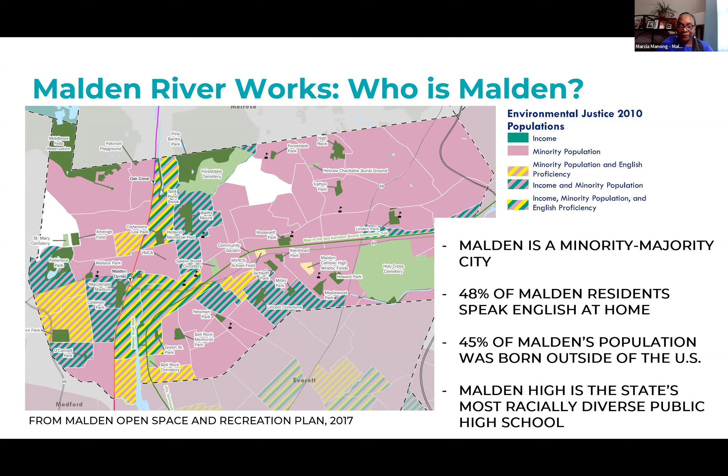So just a bit about who is in Malden. We are a minority-majority city with environmental justice populations dispersed in several communities throughout the city, including in close proximity to the project site. 45% of Malden's population was born outside of the US, and Malden High School is the state's most diverse public high school. We take pride in who we are and how our diverse cultures complement one another. Next slide, please, thank you.

How we began. The Norman B. Leventhal Center for Advanced Urbanism solicited international project proposals focused on equitable resilience. We formed a prize team along with Malden's Mayor, Gary Christenson, who was an ex officio member. We presented to the jury of international panelists at MIT. And in 2019, Malden River Works was awarded the first ever Leventhal Prize from MIT's Leventhal Center, inclusive of $100,000 to kickstart our project. And I can't tell you how invaluable that startup money was. Next.

The Leventhal Prize sought proposals that made equity a central goal for resilience efforts, to develop physical design solutions that do not reinforce existing inequities and wouldn't create new ones. What we needed to do next was create the governance structure, determine exactly what it was going to be, and assemble the steering committee that was representative of Malden's diverse communities. Next.

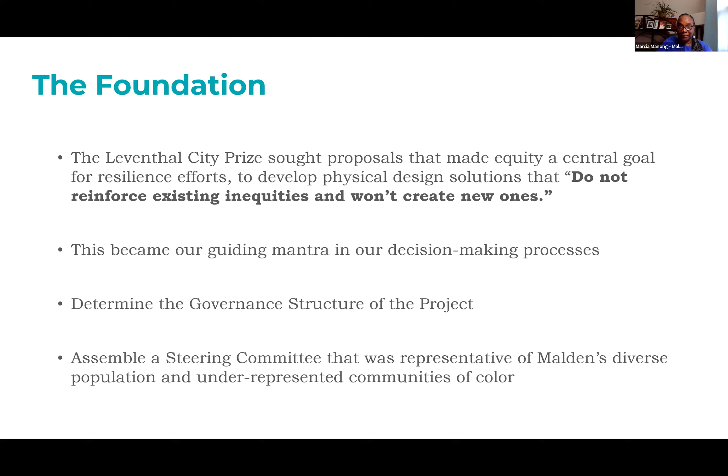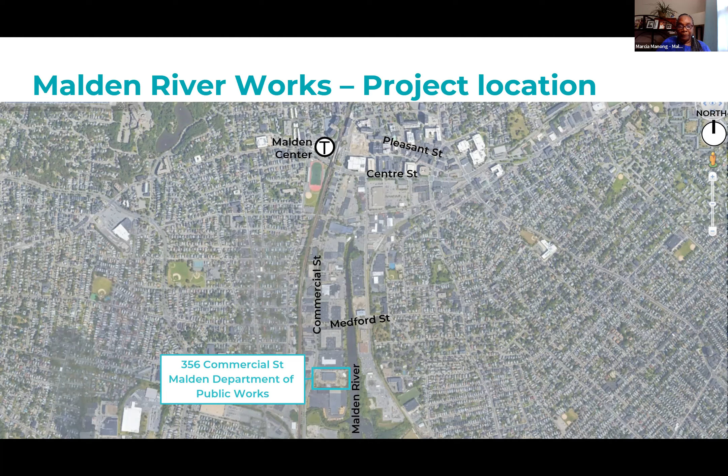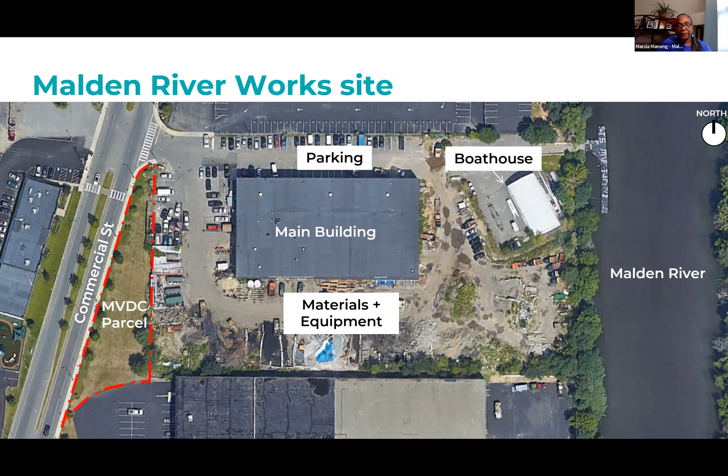Again, this is another shot of our existing boathouse, which is, of course, going to change in the new design. The second part of the project is transforming a portion of the DPW parcel along the river into a climate resilient greenway park that will allow public access to the Malden River for residents, many of whom have lived in Malden their entire lives, yet never had access to the river. And as you know, public spaces are becoming increasingly important areas of recreation, as the typical indoor recreational spaces are closed or limited because of COVID. And this becomes even more important during the hot summer months, particularly for environmental justice communities who often lack economic stability and resources to help them mitigate the impacts of climate change. Next.

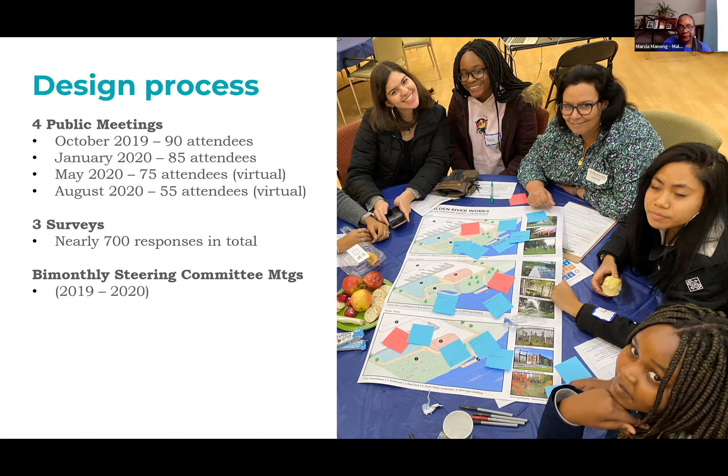Our design process was collaborative, inclusive, and sought to listen to as many voices as possible. Translation and interpretation were a necessary part of our outreach and public meeting process. And we held 4 public meetings, 3 surveys, and had bi-monthly steering committee meetings.

Next. To get to the design goals, it was an iterative process. And eventually we came up with these 6 design goals: flexibility, connectivity, river access, inclusivity, nature, and celebrating Malden, reflecting the community stories and culture of Malden in the design of the park and the DPW. Next.

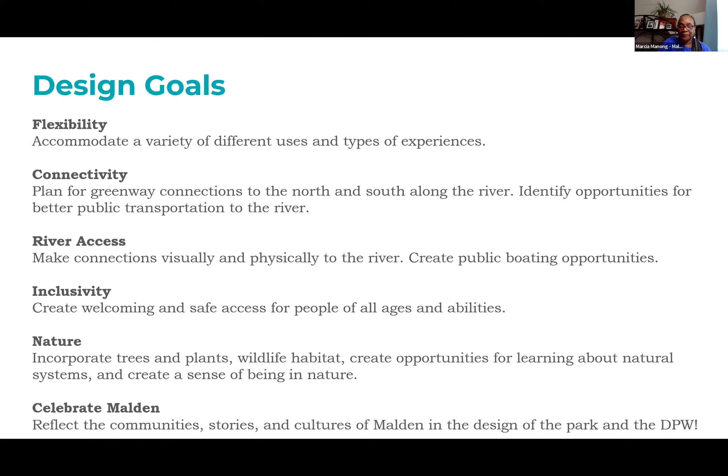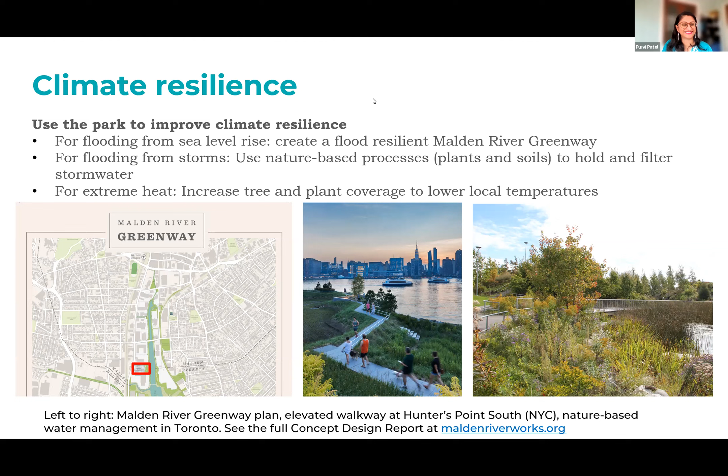So there are several environmental justice communities in Malden, Everett, and Medford located within 1 mile of the project location. Under the state's environmental justice criteria, the area includes minority populations, populations that experience English language isolation, and combinations of minority populations and lower than state median income, minority and English language isolation, and minority populations, English isolation, and lower than median income in combination.

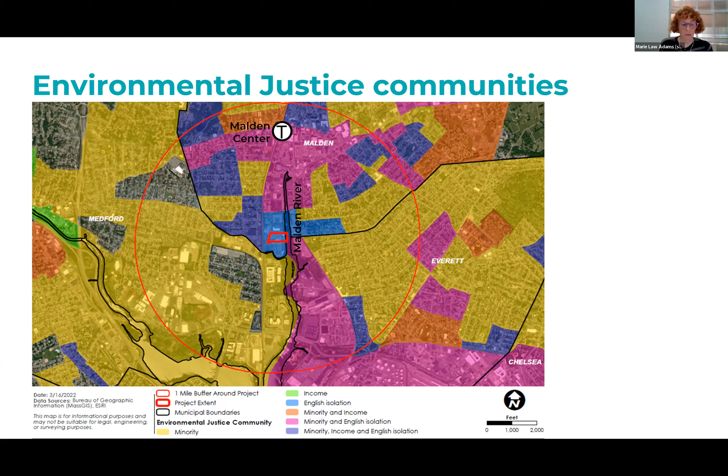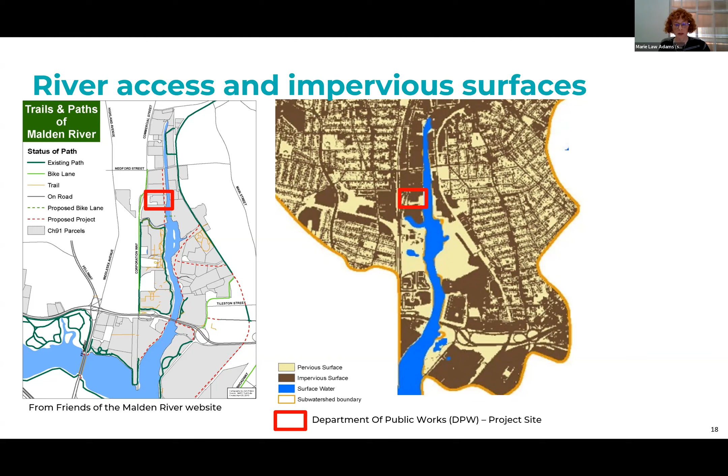The communities neighboring the Malden River Works site are burdened by environmental injustices that come from a history of industrial uses along the Malden River, which affect residents to this day. Some of these negative impacts include lack of public access, as described by Marcia, and an excess of impervious surfaces that contribute to higher temperatures and urban flooding, increasing the risk from climate change. Malden residents have identified access to the river as a high priority in other planning initiatives, such as the Malden River Greenway plan that was mentioned earlier. The project incorporates the community's priorities by building an important part of the Malden River Greenway on the only city-owned parcel on the riverfront in Malden.

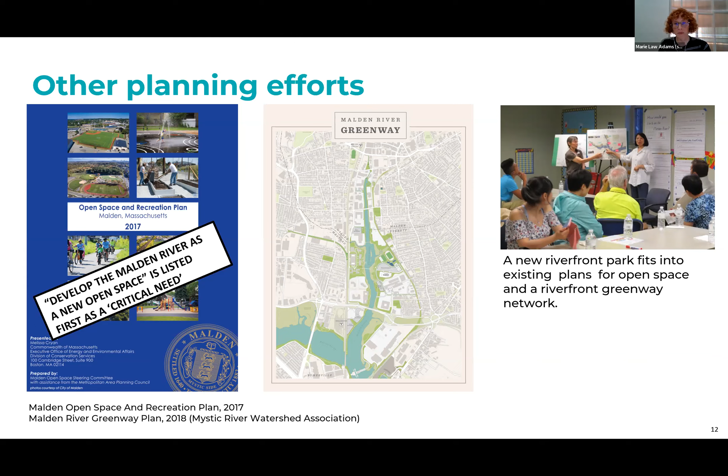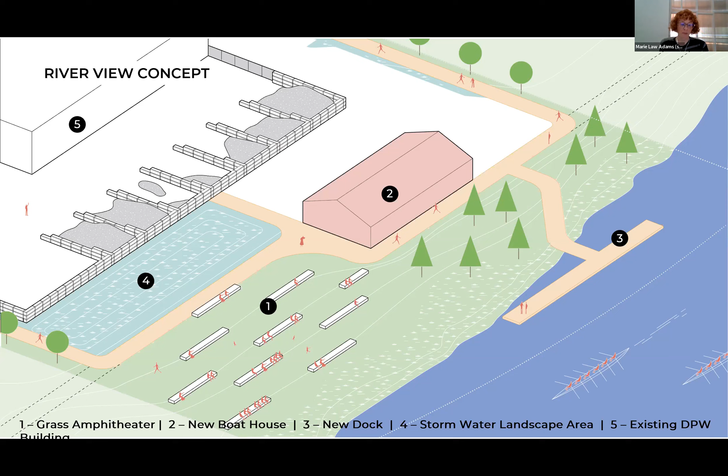So now I'm going to give an overview of our participatory design process, where we started with 3 alternative concepts for the new riverfront park space. Each of the design alternatives includes 4 main elements: a reorganized DPW yard to make space for the new park, incorporation of the Malden River Greenway path across the site, pathways to Commercial Street for safe access to the river, and a new boathouse and dock for Malden High School's crew teams, as well as community boating. The concept you see here is called River View because it focuses on creating a grassy stepped landscape-like amphitheater that would support views and enjoyment of the river.

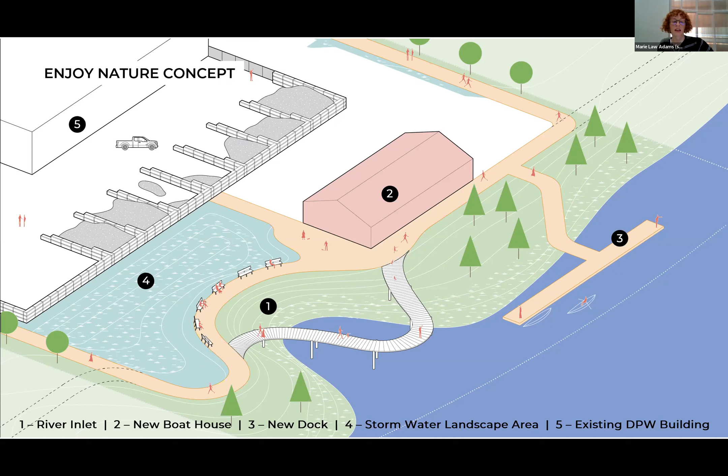The Enjoy Nature concept is focused on bringing people to the river and restoring the river ecosystem with a natural riverbank and boardwalk over the water. And then the third concept that we looked at was called Flexible and centered on the idea of a large, flat, open lawn that can be used for organized events as well as informal gatherings.

And so during the concept design process, we heard what were the likes, dislikes, and other comments on each of these concepts and found that Malden's communities tended to prefer the Enjoy Nature and Flexible concepts, and that the River View was too limiting in its use of the space.

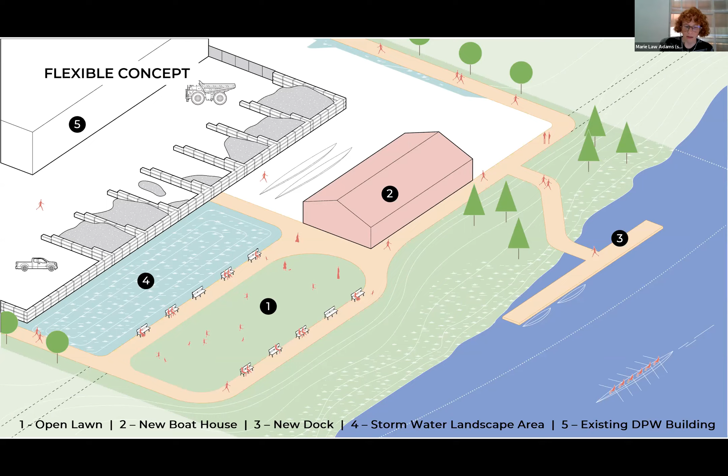This is the concept design that was created in response to this feedback, which combines major aspects from the Flexible scheme with the lawn that you see in the middle of the image and the Enjoy Nature scheme with the restored river's edge and fully accessible pathway to an extended public dock that provides access down to the river. It also keeps some of the sentiment of the River View concept by incorporating seating along the length of the accessible pathway to the river.

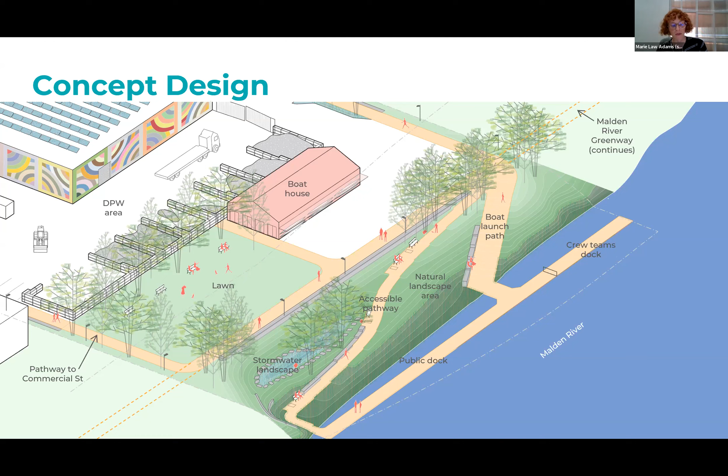The proposed location of the boathouse was also moved west at this time based on community feedback so that it would be farther away from the Malden River Greenway path to enhance a sense of openness and safety as people were using the path.

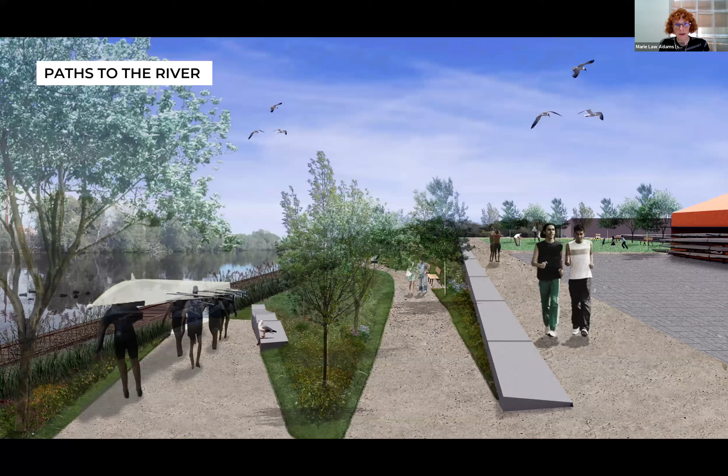These were some eye-level perspectives that were created at that time to create a sense of the look and feel of the park based on the design. So this is looking at the open lawn, the accessible pathway down to the river, and then some of the green stormwater infrastructure.

The project team created a concept design report at the conclusion of the first year of the participatory process to hold ourselves accountable to the priorities and vision established by Malden's communities. And then as the design has been advancing past the concept stage, the project website at maldenriverworks.com is regularly updated to keep folks informed of progress.

And so since major aspects of the physical design were established at the end of the concept design process, the Malden River Works team has shifted our outreach accordingly. We continue to hold community meetings to provide updates on the status of the design development and permitting process. We also continue to have bi-monthly steering committee meetings.

And then to increase the reach of the project, the steering committee piloted a decentralized meeting strategy last spring to bring the project to community meetings already happening in Malden, reaching over 340 people, many of whom were new to the project. We've also started to hold events on the river. You can see a picture from a couple of weekends ago on the right to build community there and envision how the river will become a civic space.

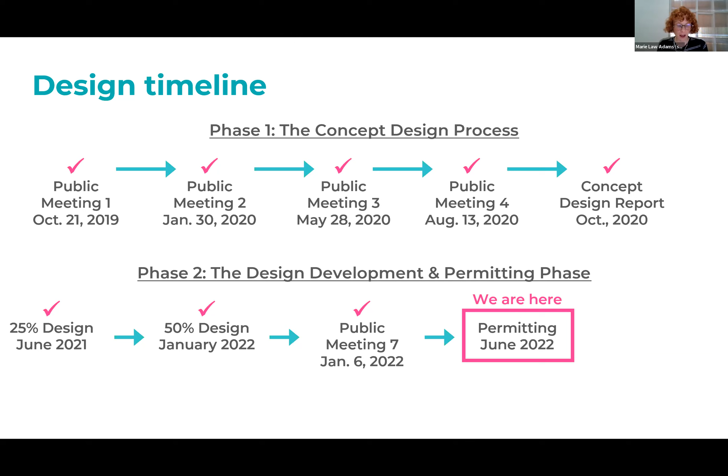And then this winter, we will hold arts, culture, and education workshops to figure out how the project will reflect Malden's communities in those ways. The bottom row on this timeline shows our progress through design and engineering after the first year of the concept process.

And then this is an updated view of the current design, which is really similar to the concept version, but with some small changes that have happened in the course of design development, such as the decision to reconfigure the accessible pathway to the river to avoid disturbing existing vegetation and shade trees that help reduce the heat island effect. And so that concludes the overview of the design process and current outreach. So I'm going to pause now and allow Purvi to take any questions.

Great. I don't have any questions. I did want to fully disclose that two years ago, I think it was 2021, I was one of the participants in the MVP review process that reviewed this project. So I have a lot of familiarity with it, and I see it as a really great blueprint for projects moving forward, and really just delighted to see that there's more access. I know that you're probably going to get into environmental impacts, so I wanted to wait to ask questions once that was the next step.

But thanks, Marie, for all of the information regarding how the public was consulted with the different concepts for selecting this amalgamation of designs that you now incorporate into the current design. So can you just tell me what the plan is regarding tree retention and tree planting?

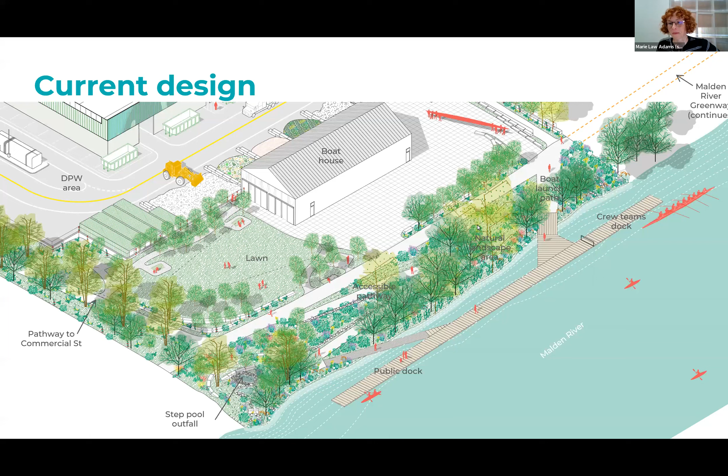Yeah, we're bringing, oh, Jen, would you like to answer? Okay. No, I was just about to say we're about to talk about it. So we can keep going, and I'm happy to keep going with that. Thank you. Okay, yeah, no worries.

So our current design, as the design process has done through the beginning of the process, really balances the activities of the DPW and their staff with the design of the public riverfront park and the desire of the community to make this public parcel and new open space welcoming and safe as a connection to the Malden River.

The design formalizes the DPW yard activities, creating storage areas for materials, as you see here, including a covered salt storage area and parking areas for equipment and staff. The design also allows for resident access to a yard waste recycling area that is now going to be outside of the main operations area. The DPW yard is separated from the publicly accessible spaces through fencing and gates that will provide safety for the public and security for DPW.

While the DPW's main entrance and exit on the northwest corner of the site will remain, an additional opening curb cut is proposed on the southwest corner of the site to allow for separate public access points to the parking areas proposed. This can also be used as a secondary egress point for the DPW staff and their equipment as necessary. Many of the features of the riverfront park that Marie mentioned that were developed through the concept design have stayed very similar. I'll just note a couple differences here.

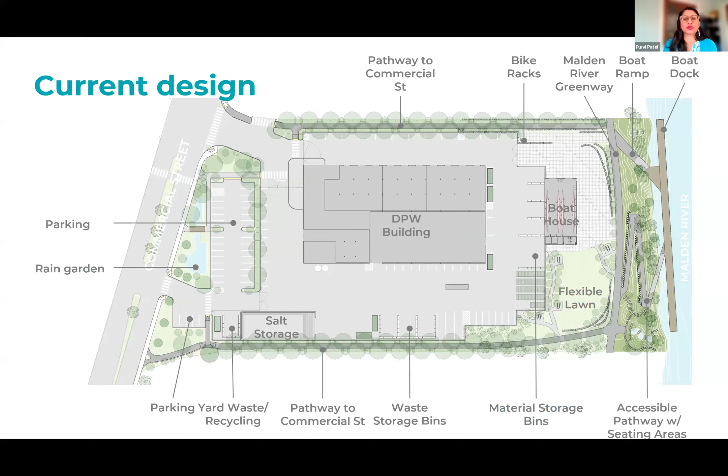Oh. Do you want to ask your question? Sorry. I didn't want to interrupt you, but I did want to ask a question while you're on that slide. Can you tell me what the site is to the north? And you can even bring it to the next slide, that's fine. My question relates to the discontinued area where there is a crosswalk along the northern stone dust pathway. Can you just remind me what is located to the north?

Yeah, so to the north, there's a property that's owned by Combined Properties. Actually all the adjacent properties, both to the north and to the south, are commercial properties with parking areas. That's the immediate point there. There is a sidewalk, at least on this side, that people can access all the way down Commercial Street. That, I believe, also has lighting and things of that nature for accessibility for people on foot or by bike.

So Jen, when people enter that northern access point, they can go straight to access the DPW building or the riverfront, or they can turn left into that northern site and cross the crosswalk? I'm trying to orient myself. Well, I'm just turning my head so I can. So if you come in the northern access, and the Malden River is directly in front of you to the east, you could turn at that northern... Yes, Marie's highlighting that crosswalk.

Cars have access to that area? That is correct. Yes, that's an access. That's a driveway to a parking lot now. Okay. Great. I wanted to understand why there's a crosswalk there and not a continuous path. Gotcha. Yes. It could have been clearer. Thank you.

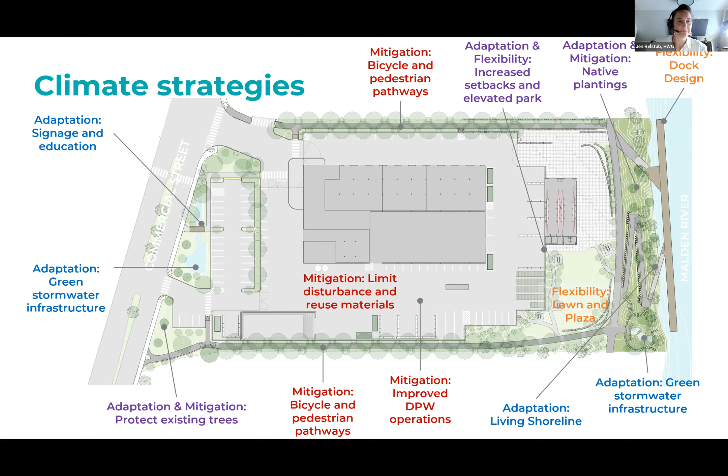It incorporates the living shoreline along the Malden River as well to restore and enhance the native species and also support biodiversity and wildlife. The use of the subsurface chambers, water quality units, and overflow structures, which are located within the DPW yard, provide treatment of runoff and storage of water without impacting the day-to-day operations.

In contrast, in the riverfront park and in the open space, we really tried to utilize surface practices and visible uses of nature-based solutions as preferred opportunities to highlight water and stormwater and plants as valuable resources to the community. No infiltration is proposed on the site due to the existing soil contamination from historical issues, as Marie discussed. Instead, these stormwater practices will be lined and water will be directed towards drainage pipes and outfalls.

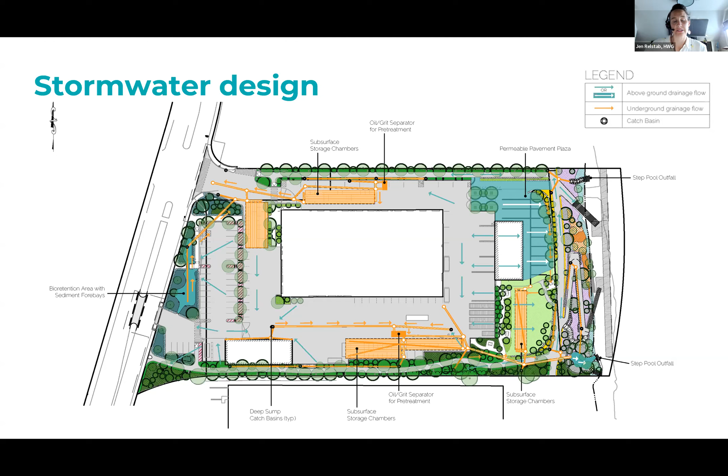Our team has worked with the city's licensed site professional, Jeff Nangle, who's on this call, to develop appropriate soil capping strategies that differ depending on the proposed uses for the site. Again, we have public spaces and some that are not really open to the public. And those capping strategies vary between hardscape to using geotextiles to using planted barriers and clean soil. And we are working through that with the city's LSP to develop those strategies. Next slide, please.

We have a robust planting design, and in our design, we're creating 9 distinct native plant communities, or what we're referring to as ecozones. You can see them on this slide in these various shades of color or hatching. The objective of the planting plan is to increase the ecological services, including the preservation of some of the healthy existing trees that are on site and the addition of more than 200 new trees, including saplings and plantings.

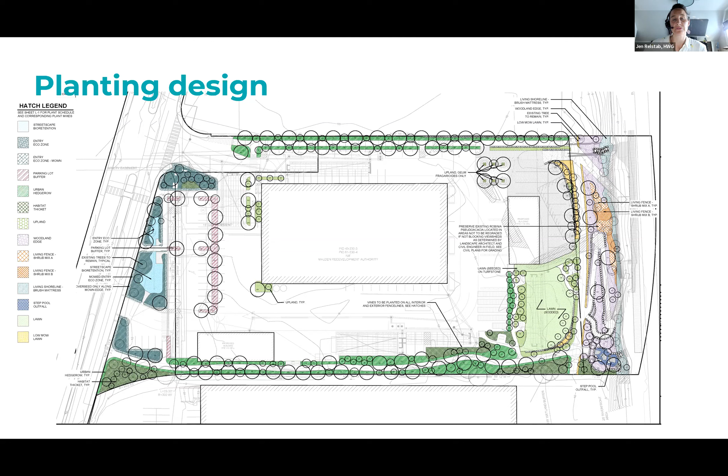Each plant community is comprised of carefully selected native plants that support the ecosystem of the site and the river system, increasing and improving life for insects, birds, and animals. Go to the next slide, please. This diagrammatic section includes a visual of 7 of the 9 ecological niches on site. In addition to the wildlife habitat, these selections provide for seasonal interest for visitors, really trying to engage the public at the site at various levels, all the way from the entry point at Commercial Street back to the riverfront area at Malden.

I'll also note here that in addition to providing these services, the tree canopy where we're planting it really provides an opportunity as a buffer to capture air particulate matter from the operations of the DPW yard, as well as a visual and noise barrier, although we are encouraging opportunities at various locations to have the public interact or at least observe the DPW activities to the extent possible. Next slide.

The nature-based approaches that we're using on site, I've already touched on them. I just wanted to show some pictures here of what they might look like. These approaches utilize pretreatment, such as sediment forebays, to remove some of the sediment and debris from the water before entering these. And once in, there is also the step pool outfall. Native plants and soil really filter the runoff. Also with the step pool, we use rocks and boulders to help slow the water before it exits the site and enters the Malden River. Next slide.

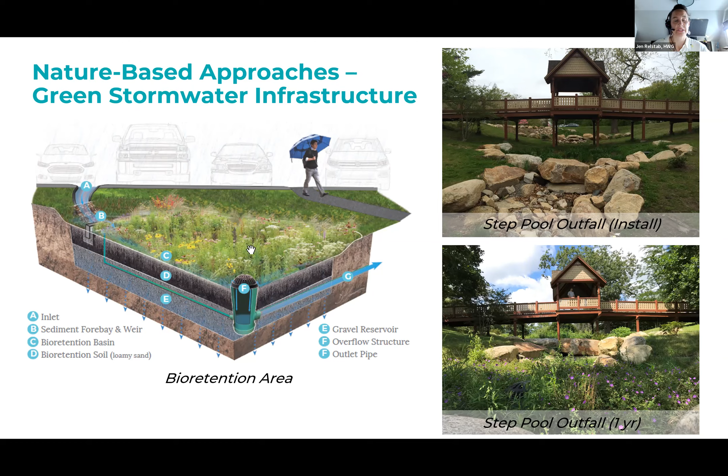I wanted to highlight also the living shoreline techniques that we're incorporating. Living shorelines use natural, native, and live plantings to protect the riverbank from erosion by stabilizing the soils with the root systems. It also provides wildlife habitat, of which we've seen many while we've been on site. We're currently recommending the use of live staking, that's dormant woody cuttings, brush mattresses, and fascines, which are living branches bundled together at the toe of the slope to protect from erosion.

These strategies minimize the disturbance to the bank, and we are also recommending addressing the slope, which is pretty steep now, to allow for a more gentle slope that will, again, over the long term, stabilize the soil. Next slide, please.

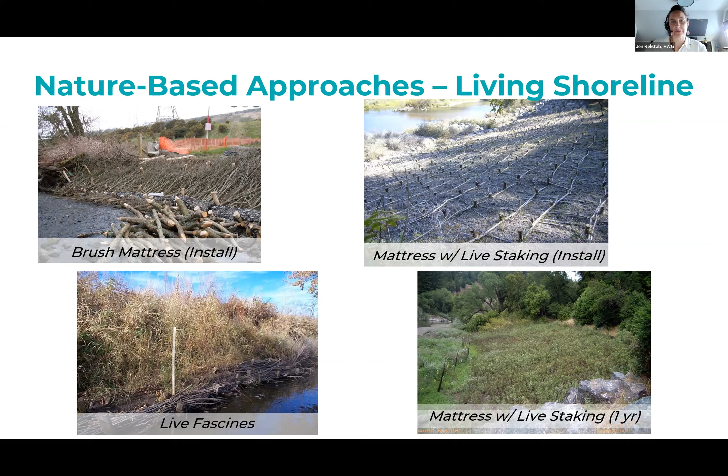I just want to touch here on the dock design. The dock design that we're proposing replaces the current temporary dock with a permanent structure that can be accessed in two ways, one by a wider boat ramp on the north side, and second by a narrower accessible pedestrian path dock. And this is going to be open and accessible to the public all year round. The design is about a 10-foot wide, 300-foot long structure with a wooden deck, as you can see in the picture on the left.

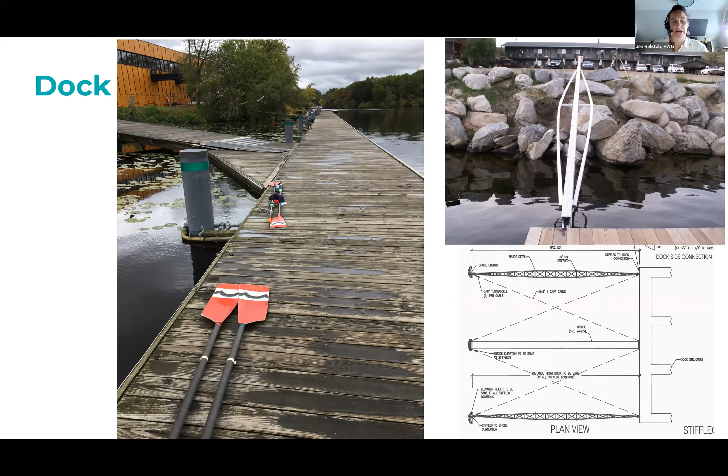This is an example from another site on the Charles. We're proposing a sustainable wood, black locust, that will be used as a local and sustainable option. We're suggesting that the dock be stabilized using stiff legs, basically a connection placed on the shore and then connected to the dock. That would allow for some variability, but also stabilize it for the public to use. And again, we are not intending to take this out during the winter months and instead allow people to use it, with the exception of perhaps local crew team practices or events such as regattas.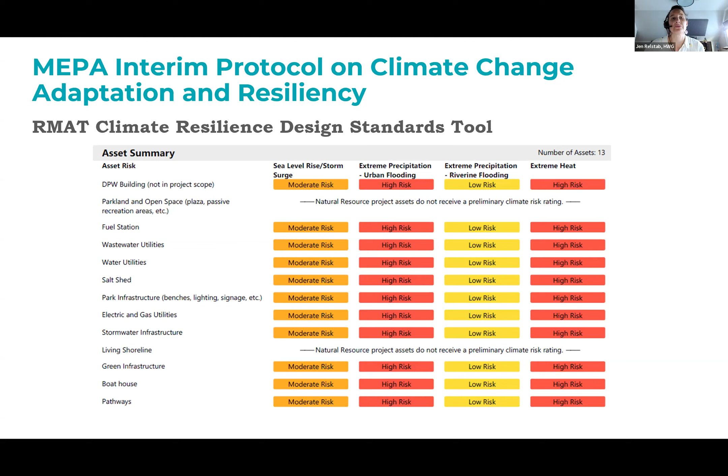Next slide, please. As part of MEPA's protocol to address climate change, the project used the Climate Resilience Design Standards tool, developed by the Resilient Massachusetts Action Team, or RMAT, to assess the potential risks as well as the design standards and planning horizons for this project that look at sea level rise, extreme precipitation, and extreme heat, or urban heat island. On the screen is a shot of the output of the tool, showing the various risk levels of each of the proposed assets of the project, or in some cases, assets already on site that we're not changing. Next slide.

So the design of this project actually started before the RMAT tool was available, but as we've mentioned many times through this presentation, our design process really reflects the climate resiliency guidelines and strategies outlined by the tool. This is just a snapshot of the guidelines recommended through that tool and the various project design elements that meet those criteria. Next slide.

I'm sorry, do you want to ask your question? Yeah, and Jen, you're very responsive. I didn't have it up more than a second before you noticed it. Sure. It's not like it's been there a minute.

Can you talk about some of the newer data that's come out from the RMAT tool in terms of precipitation data and sea level rise data that you've incorporated into the design, where there have been adjustments or refinements in the current design? Sure. So as I mentioned, the project really started with a climate resiliency focus. So since our team has been working on it post concept, we've been utilizing the most up-to-date data, and also up-to-date guidance from the state.

We've been utilizing the NOAA 14 plus data in terms of precipitation, and I know the RMAT tool has incorporated both that data and other data sets which are very comparable. Just as a point of comparison, the data we used, NOAA 14 plus, is what is being recommended by MassDEP, the Department of Environmental Protection, through the new updated standards, which are still being worked on, but the data is very comparable. I would say it's not exactly the same, but very comparable.

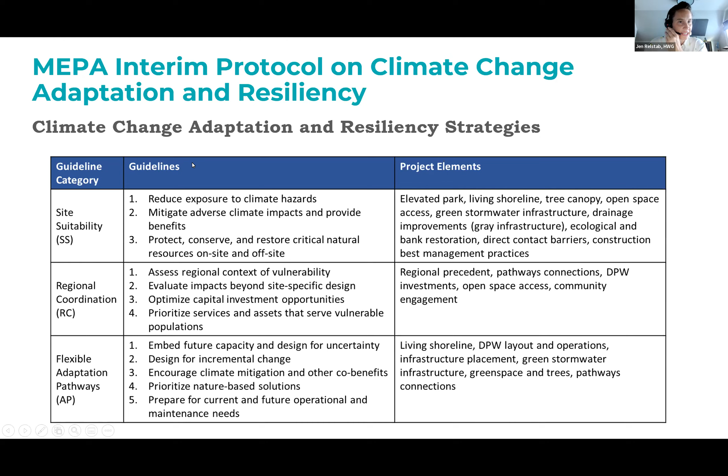Okay. I just wanted to pause at this moment. I know Amy has the slides to show the wetlands impacts, and Eric will have questions regarding the floodplain at that point. So that's coming up, right? Yes. So actually, I only have one more slide, and then Amy's going to take over. You can go to the next slide.

Thank you. So as we've talked already, the public involvement process, especially with the environmental justice community, has really been threaded throughout the design process and public outreach to ensure that the voices and the visions of the project at the origin are continued as an integral part of the design. We will continue to reach out to these communities to ensure that that connection and relationship that has been established continues.

As another part of the protocols, there is an analysis to evaluate potential burdens on these communities and also talk about the benefits of this project. So we have done that. We have used data, screening tools, and reports provided by the community and also the state and federal government to better evaluate the health risks and community risks of this project.

And again, we are not anticipating any adverse impacts, but there will be some temporary construction impacts to the community because it's the DPW yard and those activities, and there's noise and other results of construction that would need to be mitigated to the extent possible. In general, we think this project is really going to lead to environmental, social, and climate resilience benefits for all of its residents, and particularly the adjacent environmental justice communities.

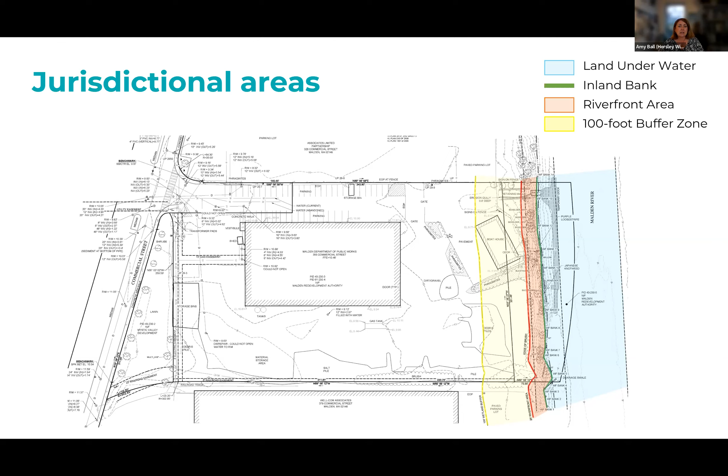So as we mentioned, there are a number of anticipated permits and approvals that are required before this project can move forward. Jen noted that we just today got our order of conditions from the Malden Conservation Commission. We are seeking another local permit from the city, the land disturbance and stormwater permit, which was submitted at the end of April, and that's still pending. The MEPA certificate, which is pending following the conclusion of the process that we're beginning this evening. And then for work within water, below the mean high water and within previously filled tidelands, we will need to acquire a Chapter 91 license from the MassDEP Waterways Program.

And we will need 2 approvals from the U.S. Army Corps of Engineers. One is a general permit for working below the ordinary high water mark, and that is for work associated with the dock, as well as a number of the shoreline stabilization measures, which do extend below the ordinary high water. So the live fascines, portions of the brush mattresses, all mitigated in nature, but they do fall within jurisdiction.

And then the second permit or assessment that we need from the Army Corps of Engineers is a Section 408 assessment, which we understand from our conversations with the Army Corps will run concurrently with the general permit review. And that is associated with the federal navigation project within the river; there's a shoaling area that's defined by the Corps. And that is one of the reasons we have selected the stiff arm or stiff leg attachments or footings for the proposed dock, to accommodate some of those requests from the Army Corps. Next slide.

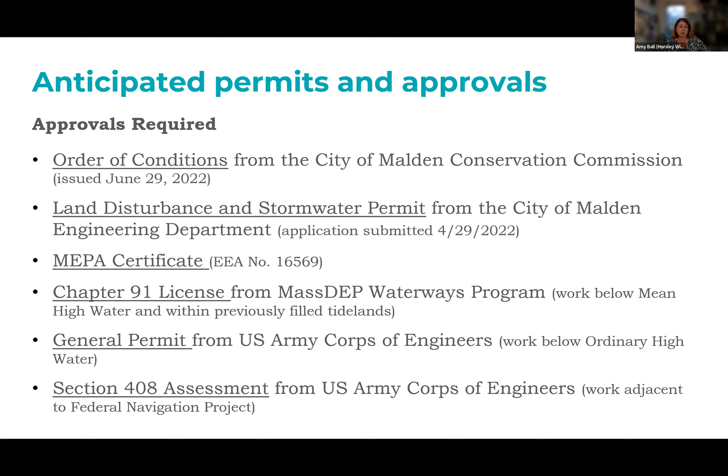Our anticipated permitting schedule will extend for quite some time. We started with just the submittals, even for the ENF, at the end of March, with some pre-screening notifications. And as Purvi was discussing at the beginning of the meeting, depending on the outcome of this comment period, we may end up receiving the MEPA certificate somewhere in the order of July 15th for this initial process. And then again, depending on whether it becomes a rollover EIR or a single EIR, we may complete the MEPA process maybe as soon as the end of September.

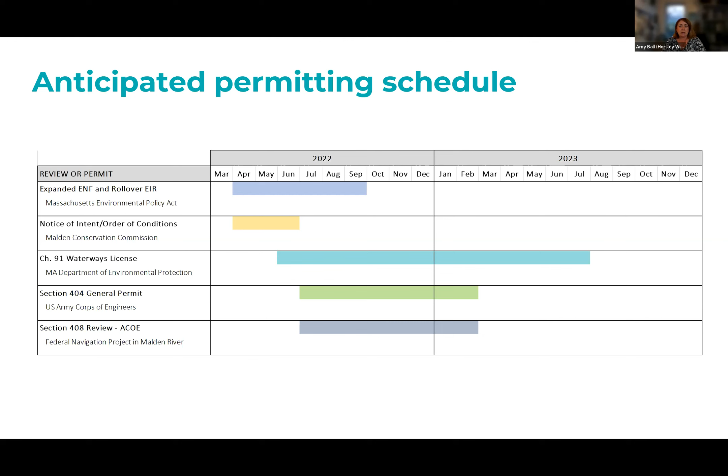We have already received our notice of intent order of conditions from the Conservation Commission, and the waterways and Army Corps permits will extend out for several months, the waterways permitting process taking approximately a year from now. Next slide. So before I turn it back over to Jen, I don't know whether there are any comments that Purvi might like to take regarding the permitting and the resource areas.

Thank you, Amy. I'm happy to turn this over to Eric to ask his question. Thank you for your patience, Eric. I think this is very informative. You're welcome. And yeah, I can be patient. I wanted to see the whole presentation. I only have a couple questions.

And just by the way, I work for the Department of Conservation and Recreation Flood Hazard Management Program, so I'm interested in the flooding issues. I noted in the ENF that there is some permanent impact to bordering land subject to flooding, 2,000 or so square feet. Now, is that impact strictly the stabilization that you've been describing?

Yes, Jen, you can correct me if I'm wrong, but I believe it is associated with the live fascine placement and the brush mattresses that all extend within that elevation 4. That's correct. Okay, and are you being required to provide compensatory storage, or is that a non-issue on this site? We have not been required to provide compensatory storage. We believe that because it is live plant material, the impacts to the bordering land subject to flooding are fairly minimal. Yeah, I'm not surprised by that. I was just curious if that was an issue with the order of conditions.